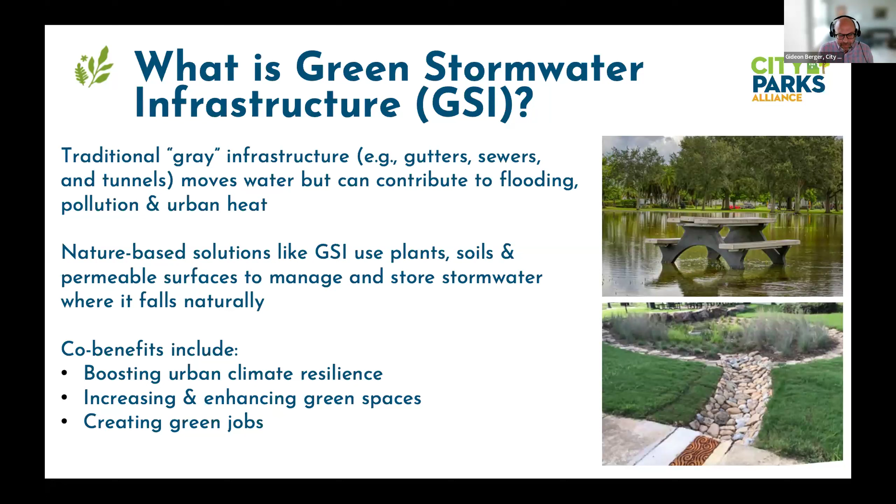Nature-based solutions like GSI use plants, soils, and permeable surfaces to manage and store stormwater where it falls naturally. Some of the benefits of using nature-based solutions like GSI are that it can boost urban climate resilience, increase and enhance our green spaces, and even lead to the creation of green jobs.

So why are we talking about GSI in parks? Well, we all know as practitioners that there's an urgent need to adapt our infrastructure as storm events have been becoming more intense and unpredictable. We also know as parks professionals that parks are the largest publicly controlled green spaces in our cities, so they serve lots of important functions as infrastructure. They mitigate heat, they manage flooding, they deal with stormwater, so they represent an incredible opportunity for putting GSI into our city's infrastructure.

When deployed, they can also enhance biodiversity and ecological health, as well as public health, by reducing air and water pollution and the effect of urban heat, creating new green space, and positively impacting public health, addressing things like respiratory and heat-related illness.

So what's the connection between parks, GSI, and equity? Well, historically, discriminatory policies have limited housing access for minorities, immigrant groups, and lower income families. These communities tend to have less green space and are more prone to flooding, extreme heat, and pollution. So GSI projects in existing or new parks in these communities can help address some of the environmental justice needs they have, and also create opportunities for workforce development and address public health disparities.

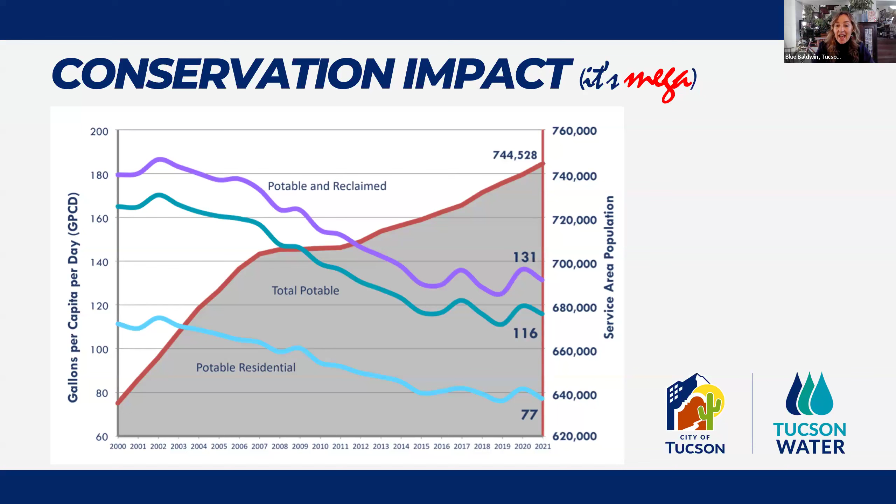Over the years, all of these conservation methods have had a humongous impact. The purple, green, and blue lines represent water sources, and the red line represents the population of Tucson, Arizona. The shocking fact is that today, Tucson Water serves the same volume of water to customers as it did in the 1980s. So we've done an incredible job.

Looking at this from a policy perspective, our mayor and council declared an emergency back in 2020. That set the stage for the different departments to develop plans to address climate action and adaptation. We looked heavily into the electric vehicle roadmap, even mandating that any multifamily housing include infrastructure for that, implementing an urban forestry program and hiring an urban forester with a goal of planting 1 million trees in 10 years, and then kicking into this green stormwater infrastructure program.

This set the stage for us to start developing a plan that was adopted by Mayor and Council in March of 2023 that we call Tucson Resilient Together. All of those programs center equity as one of the frameworks through which to enact these climate resiliency actions. As Greg was saying, the city chose to launch a green stormwater infrastructure program at the bequest of our mayor and council, who are very forward-thinking and proactive around climate mitigation.

They voted unanimously to create a fee that every Tucson water utility customer inside the city of Tucson pays into. That fee is 10 cents per CCF consumed, that's 748 gallons of water, which averages about 91 cents per household. So it's a pretty nominal fee.

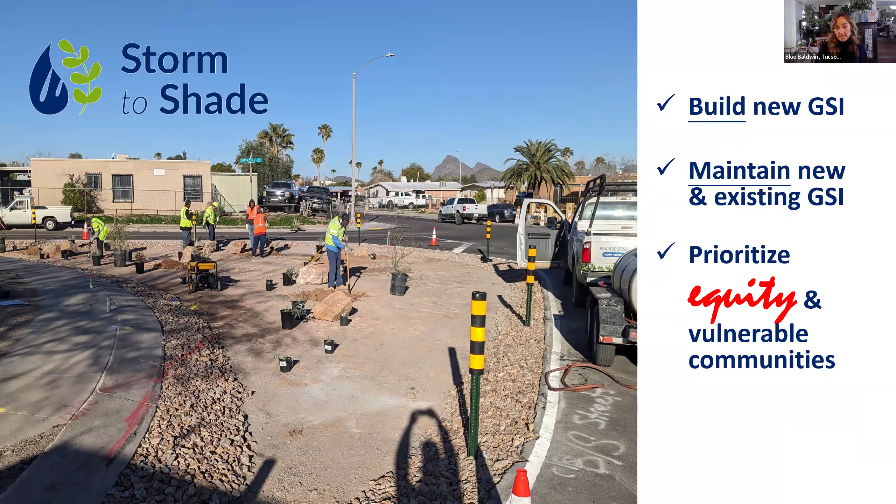Tree equity was created by an organization called American Forests. It smushes together demographic indicators like age, race, employment, ethnicity, with climate vulnerabilities like percent tree canopy and surface temperature.

So we're in it for the co-benefits, as I mentioned. For us, green stormwater infrastructure pulls stormwater flows off of impervious surfaces like roads, parking lots, rooftops, and reduces minor flooding in that way.

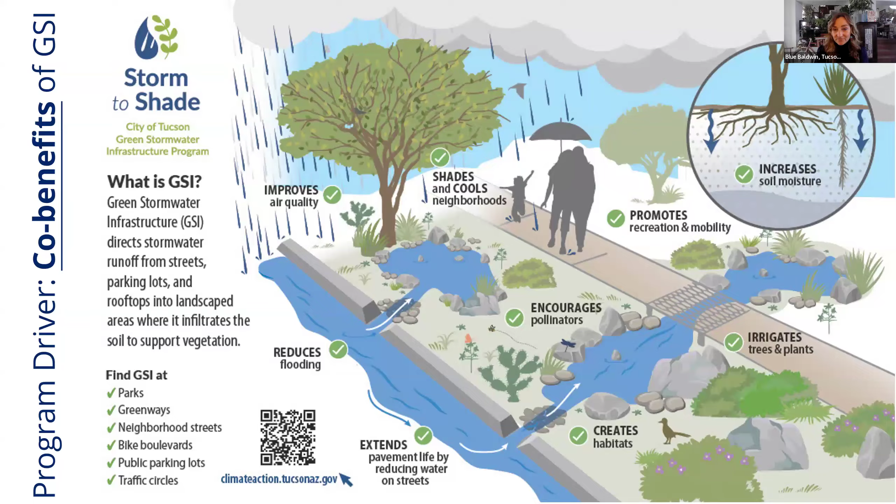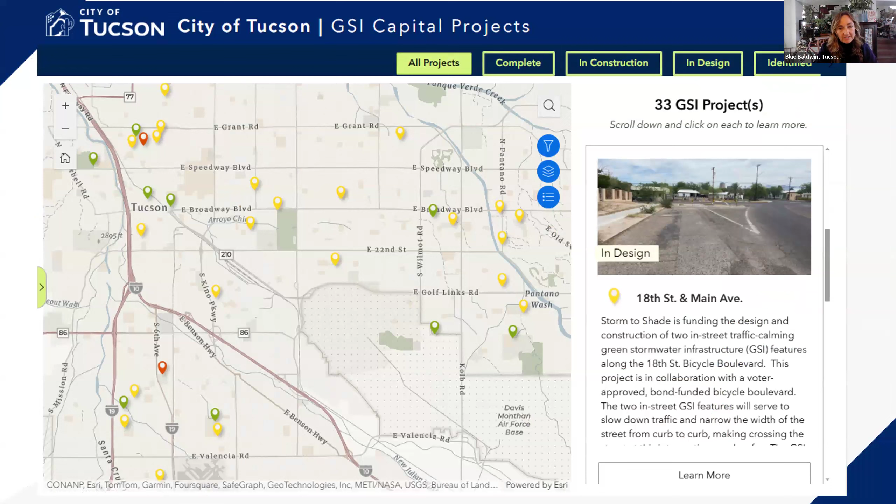The way that we began looking at identifying projects is there were already some existing improvements happening within the city. One of the big ones was the 407 bond, called Tucson Delivers Better Parks and Connections. Connections being things like pedestrian safety projects, greenways, protected bicycle boulevards, those kinds of things.

So we looked at the list of all of those projects, all of which have a certain time frame and budget attached to them, to see if there's opportunity to partner with those existing projects and add green infrastructure, bringing additional value to each of those projects and leveraging funds so that we're not mobilizing construction equipment twice. So really dovetailing with parks, who are doing the parks projects, and the Department of Transportation that's doing the connections projects.

We also work very closely with each of the city's ward offices because those are the folks on the ground close to their communities who really know where investment is needed. And then again, there's that equity piece where we're constantly looking to invest where it's most needed.

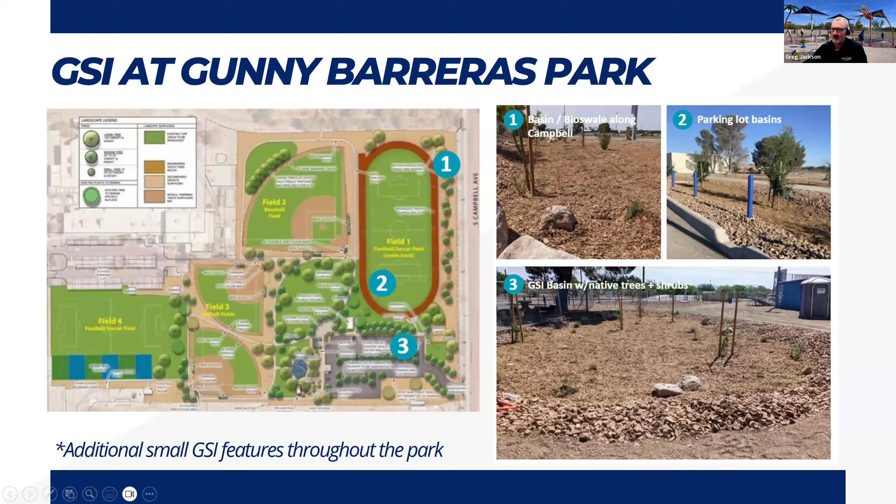But this was a project that Park and Rec was spending about $5 million. And Blue, what did you guys spend? We spent about 400 in the end, I think. Yeah, and because this was our first project, we learned a lot from this one. What we also learned is this is a great way to get more trees, more plant materials in the parks, and they had a funding source that wasn't coming out of those park funds. So the community was really benefiting.

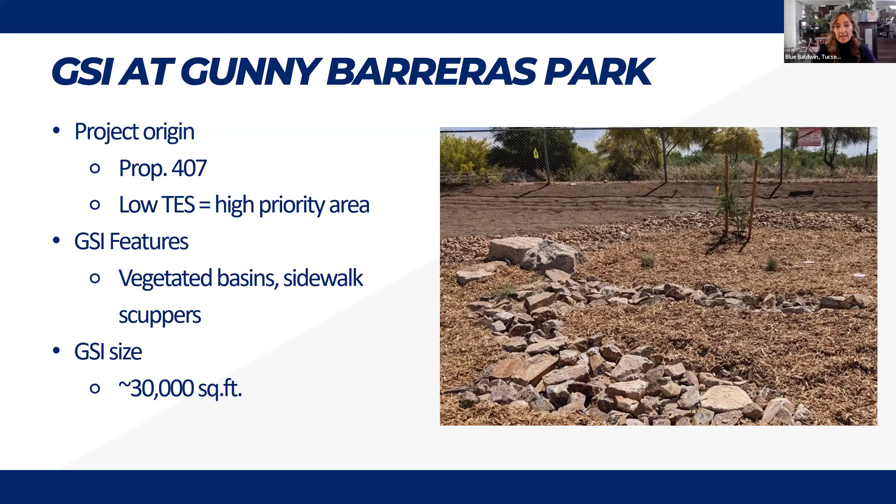Blue, anything you want to add to this slide? Just to say that, as Greg mentioned, the primary source of water for this park project is a large road that just happens to be a lot higher. So that road is the horizontal lines across the top of this graphic.

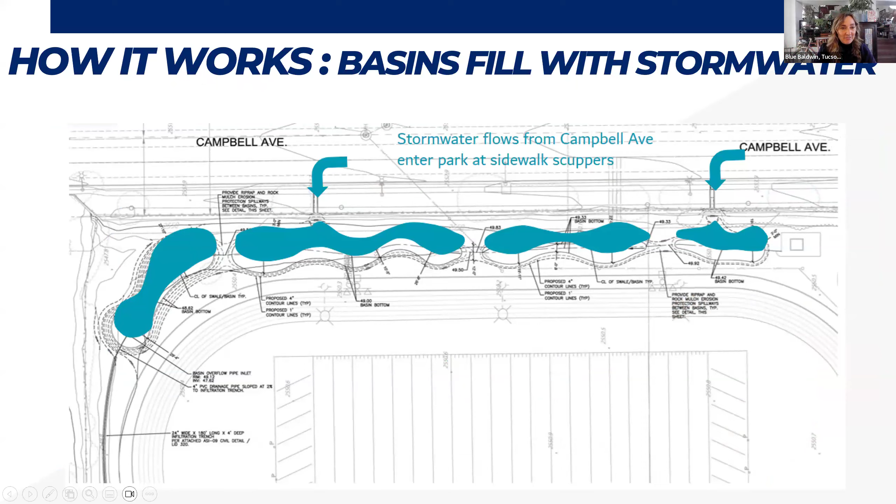Stormwater flows from Campbell Avenue through a couple of sidewalk scuppers that did not previously exist - we installed them. So it flows into these basins, which are technically a bioswale. The flow is designed to start at the right-hand end of the graphic and flow to the left, as Greg's showing with his mouse. And then finally, if those overtop, then they overflow into an existing riparian wash area. And so that's the mechanics of the situation.

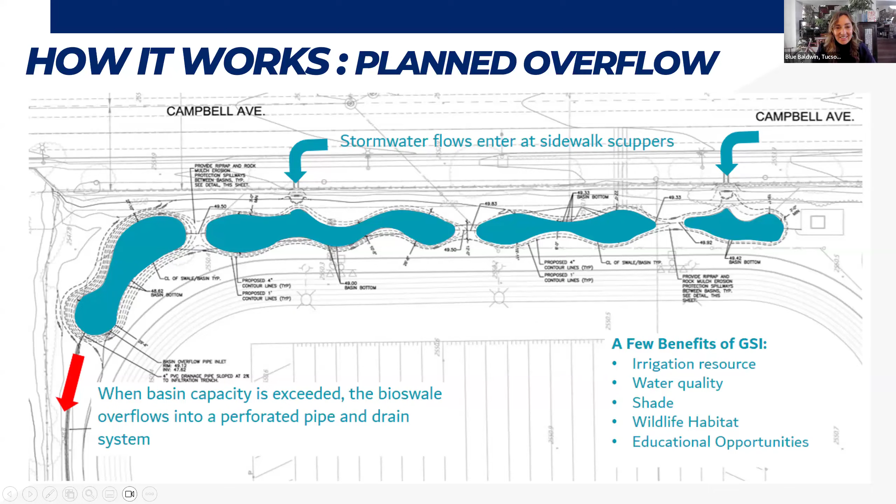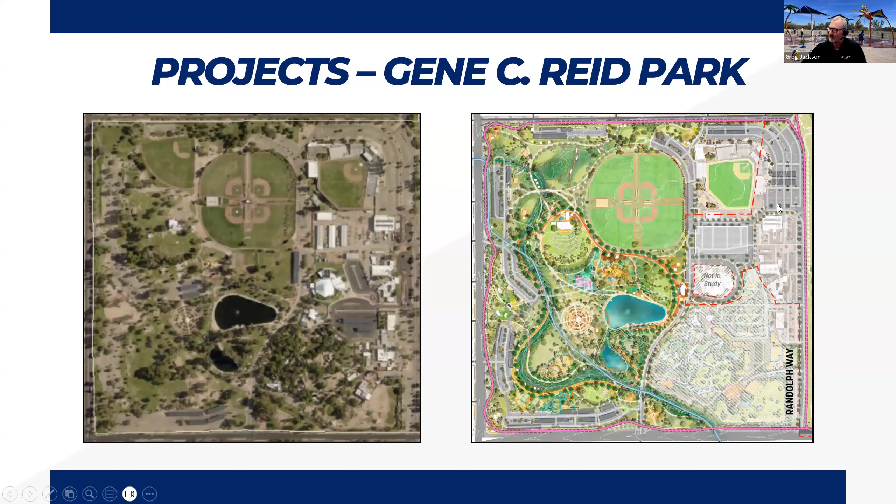I think Chris mentioned earlier being in Tucson back in November and seeing some potential future places. We've got huge parking lots around this baseball field that we're looking at for future green stormwater infrastructure projects in this space.

So all those lessons learned—as Greg mentioned, we figured out pretty quick that getting involved as early as possible saves a lot of heartache and redesigning over and over. The way we worked at Gunny, our very first project, was to integrate completely hand in glove with the existing plans, so the GSI plans just became another set of pages within the entire park plan. We used the same landscape architect and the same construction contractor—super, super helpful.

We also learned that, as probably everybody knows at this point, everything's just a heck of a lot more expensive than it was 5 years ago. When our budget was created in 2020, before COVID, we thought we'd have a lot more funding that would make a bigger impact. But it is what it is, and we're plowing ahead.

Those costs vary greatly by project type. As I mentioned earlier, projects in the street can be as much as 5 times more expensive than projects in parks or on open parcels of land. That doesn't mean we're not doing projects in streets, because streets are used by everyone, so there's a really massive impact when we add vegetation and shade on streets, affecting a whole lot of people. So we're still doing those projects even though they are costly.

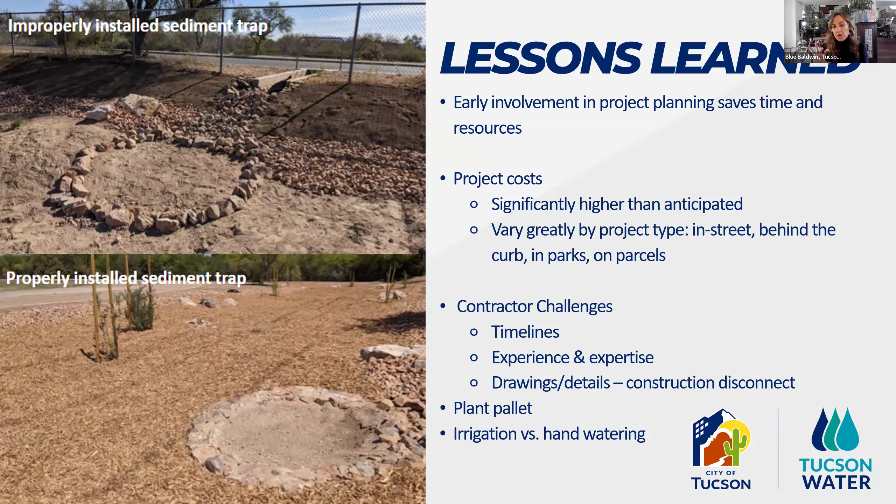And then if we have a drought that comes along, like we did in the summer of 2020, and it's 116 degrees for weeks on end, having an irrigation system in place, even if it's been turned off most of the time, is really helpful. So we're really trying to work with contractors to build irrigation systems that are very simple, pretty low tech, can be easily turned on and off, so that we're not spending a whole bunch of money on them and can still use them when we need them.

Did you want to add anything else, Greg, to that?

Nope. Okay, now we're going to dive into maintenance, because this is a huge piece of the puzzle that often goes unrecognized or at least neglected. Poor maintenance. Everybody loves a shiny, pretty new project, but the long-term O&M is a different story, and often there aren't even budgets for it.

So when Storm to Shade was imagined, its architects recognized the importance of funding for maintenance. So our maintenance budget is $350,000 a year, and we use that to hire independent contractors outside of the city to perform the maintenance work on everything that we build and all of those legacy features that we've identified.

Before we came along, there was all this GSI scattered throughout the city in parks, mostly in streets, some in little neighborhood pocket parks, but there was no proactive program. Maintenance was all reactive, i.e. a constituent picks up the phone and calls somebody at the city and complains that a tree has fallen down or a car has run into a piece of GSI, and then the city has to respond.

Another big challenge initially was that these assets were located in different city departments. So anything in a street belongs to DTM, anything in a park belongs to parks, anything on a Tucson Water well site belongs to Tucson Water. And each of these departments works very much in a silo, and they do not use a common asset management system. So there was a lot of missed communication, or just no communication venues, in order to address these challenges.

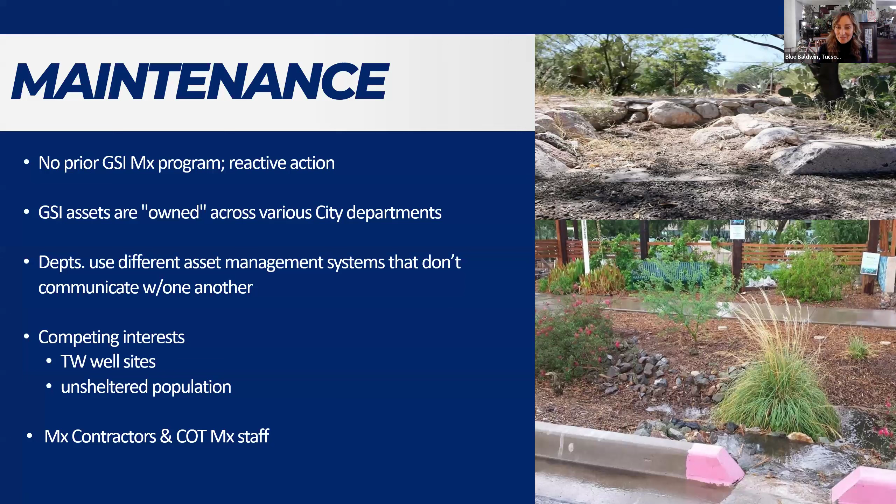We will build a project. And then finally, our internal city maintenance staff, whether that's parks groundskeepers or transportation's streets maintenance workers, didn't have a lot of education around the proper best practices for the maintenance of GSI. So there's been a lot of learning happening around here. I think I go into that on the next slide.

So we had a lot of work to do. The first thing that we did was to develop a GSI maintenance protocol, which we got adopted by all the departments in the entire city of Tucson. This is to bring everybody onto the same page about how we do the work that we're doing and why we do it this way, with the bottom line being the way that we maintain GSI landscapes is for health of the landscape, to be able to provide maximum benefits to the community, only barring health of humans and safety. So human safety first, but after that, it's all about the health of the landscape so that it can be the best that it can be and provide all of those wonderful co-benefits.

And then we went about training folks. So we started with our internal city crews, parks maintenance folks, streets maintenance folks, and we created 4 modules of training based on that maintenance protocol. We still require that every person who touches landscape in the city go through that maintenance program. So we have an ongoing schedule of trainings.

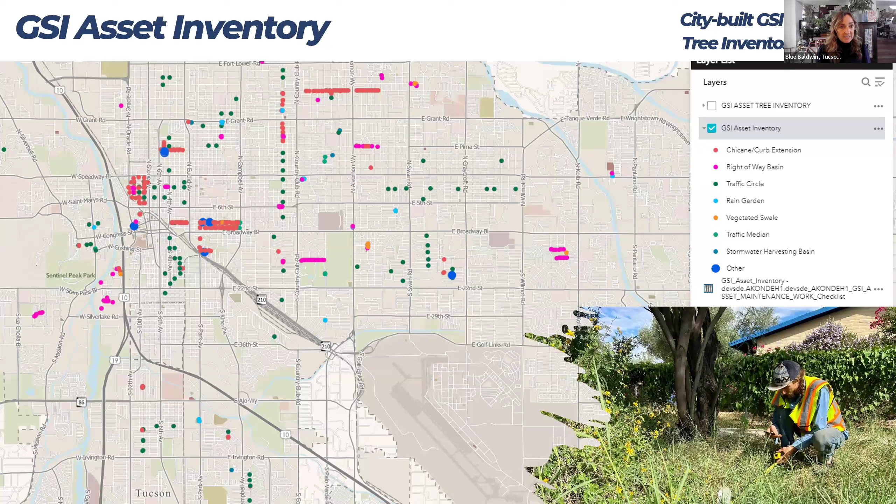We also set about penning MOUs with other city departments that very clearly outline where Greg's department's responsibility begins and ends for GSI, and our responsibility begins and ends for GSI, so that it's very clear - nobody's wondering who's on first. And we have created an asset management system which we integrated with Tucson Water. This is our asset inventory. Just to give you a snapshot, there are about 750 assets throughout Tucson, whole bunch, most are in streets.

And then this is just to wrap it all up and put a bow on it - it's all about partnerships and collaboration and communication. So my program, Storm to Shade, working with parks, transportation, Tucson Water, planning and development services, which does permitting, and housing and community development, which is building new housing.

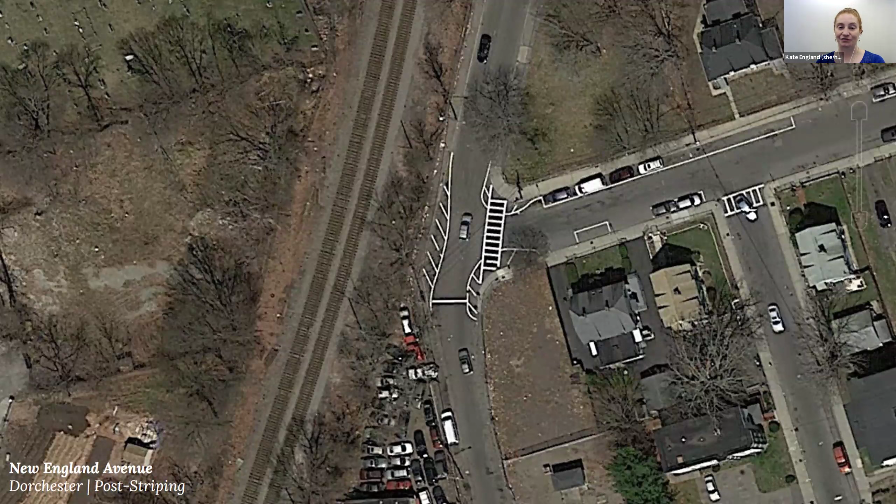You can see that there were a lot of areas that were created that were no longer part of the right of way, at least not accessible to vehicles. So years ago, when I was at Boston Water and Sewer, I approached our Boston Transportation Department and asked if I could take those hatched areas and transform them into green infrastructure.

So the goal was to create a situation in Boston where that last image was the norm, not that first image with all of the paving in that new space created by a teed-off intersection. So we put in place a policy in October of 2022, just a few months after I started my job. We required that projects in the right-of-way that altered the curb line—whether for a safety improvement, a Vision Zero project, roadway reconstruction, whatever it is—are now required to implement one of these 5 types of green infrastructure rather than just paving those newly created bump outs.

In addition to the actual design requirement of adding green infrastructure to these projects, we also included 2 operational components. The first was that we committed to always have 2 maintenance contracts available, one for vegetation maintenance and one for porous paving maintenance. And we committed to starting a citywide green infrastructure volunteer program, which we piloted in 2023 and launched citywide in April earlier this year. I'll talk about the GI volunteer program in a minute.

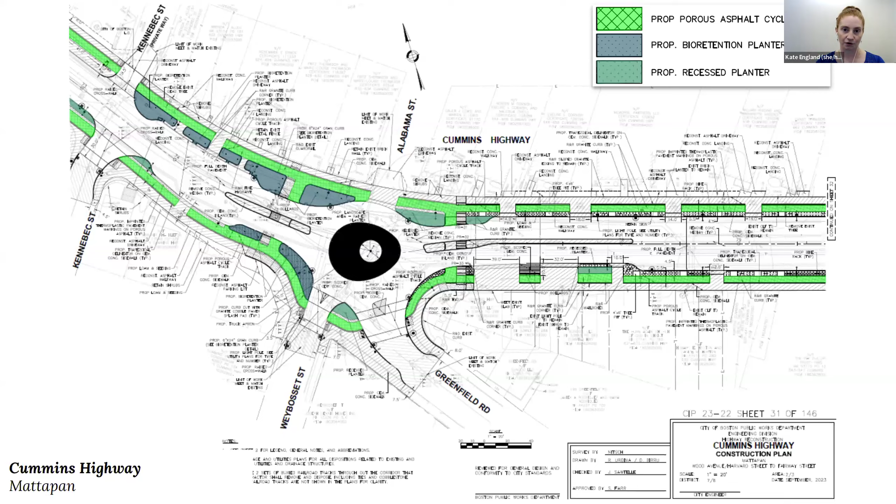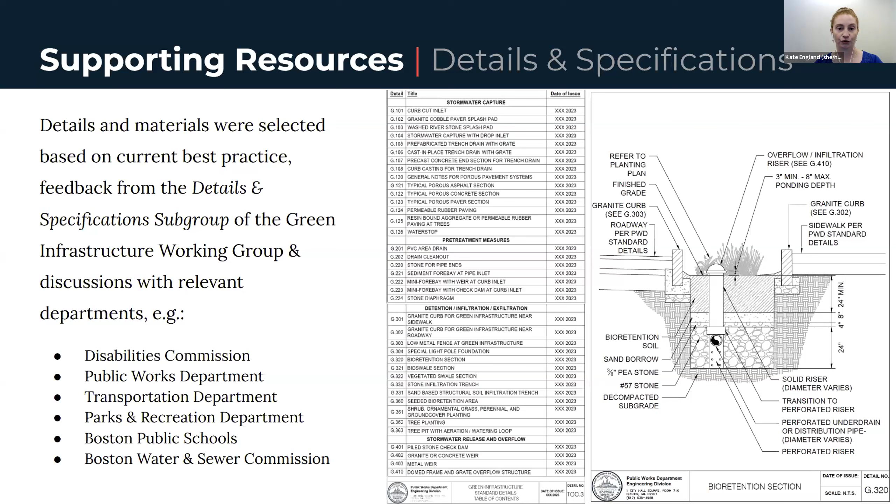We also created a series of supporting resources. Working with the city's Green Infrastructure Working Group, which I will describe in just a minute, we created details and specifications. You can see there's a list of collaborators at the bottom of the slide here. We really intentionally wanted to make sure that we had engaged Public Works, Boston Transportation, our Disabilities Commission, our Parks Department, public schools, Boston Water and Sewer, and actually some additional folks who are not listed here, so that we could get a good understanding of what these details and specifications needed to include so that this kind of green infrastructure would work for everybody.

We also created guidelines, meaning a simple guide to how you should design green infrastructure in these various kinds of roadway areas, as well as a plant palette that has been tested over several years and pared down as we've removed plants that maybe don't perform as well.

We are also currently working on expanding this right-of-way policy. Currently the policy is only triggered if you're changing curb lines, but the new policy captures both public and private projects—not just city projects, but all projects in the right-of-way. It captures projects that are going to go through our Public Improvement Commission, which is our city permitting body for the right-of-way. It's also triggered if you're replacing 250 feet or more of sidewalk.

We are also working on getting in there projects that are proposing pavement restoration for city-owned parking lots and maintenance yards—parcels that are specifically owned by Public Works and Boston Transportation's departments. And the policy's been renamed; it's now the streets policy as opposed to just the right-of-way policy. We are now allowing all green infrastructure that's contained in the Massachusetts Stormwater Handbook.

So all stormwater control measures that are listed and tested have design curves and pollutant removal curves, as well as we are adding stronger requirements for brand new right-of-ways, which doesn't happen very often, but we do have some examples in the city of Boston where a brand new road is being created. For those projects, we are aiming for a 100-year, 24-hour storm event for our design storm, so a significant amount of stormwater storage because they're blank slates and we have no existing utilities underground that we have to navigate.

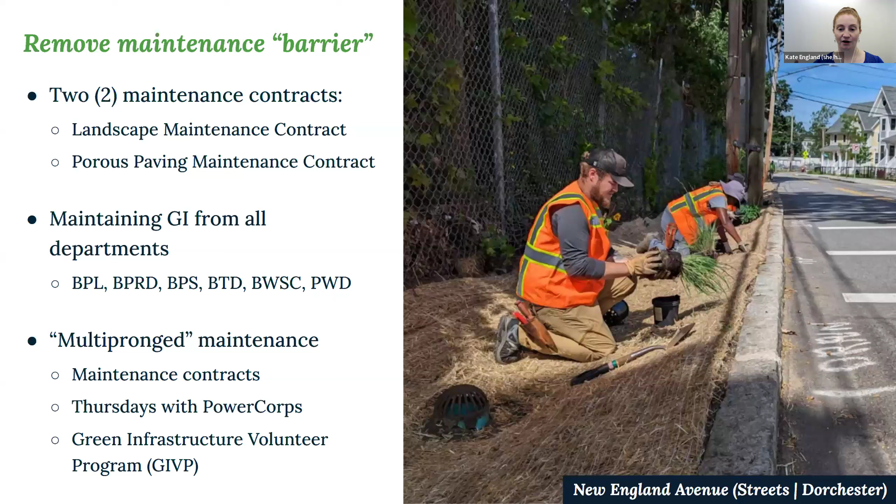We're also taking this kind of multi-pronged maintenance approach. I've seen a lot of really amazing programs in this country do green infrastructure really well but really struggle with maintenance, so I wanted to make sure we had a couple of redundancies in place so that the green infrastructure we were designing and building would stay healthy and functional, look nice, and mature and grow the way we'd like over time. So the multi-pronged approach is maintenance contracts, Thursdays with PowerCorps, which I'll talk about in a second, and our green infrastructure volunteer program.

For our contracts, we are using something I affectionately call creative contracting. Municipal entities, I assume most people on this call are familiar with public procurement, are beholden to a low bid contracting system, which means that when we try to build or maintain anything, whether street sweeping or green infrastructure maintenance, we typically have to do a low bid contract, meaning the contractor who bids the least amount of money is awarded the contract. Unfortunately, that doesn't always result in the best or most knowledgeable contractor, especially with a specialized type of maintenance like green infrastructure maintenance.

So rather than using low bid standard contracting, we are now using an RFP, or request for proposal, process. This allows us to select our contractor based on the proposal rather than the dollar amount bid. It's also allowing us to use the city's certified businesses list, businesses that are women-owned or minority-owned that have gone through a vendor verification process with the city. We can do a 3-quote system where we put out a quote to 3 qualified vendors from the certified businesses list, and award a contract up to $250,000.

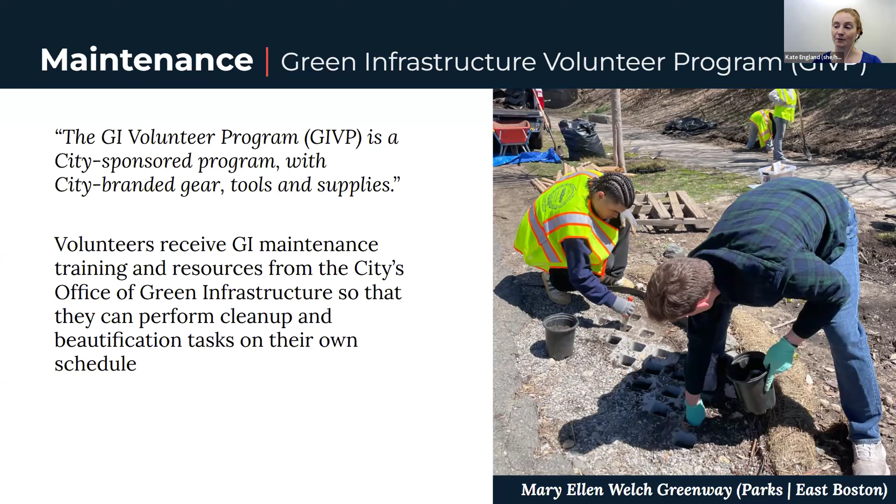We've had really great success. The program's been up and running since April, and we're really excited about how things are going.

The last thing I want to talk about is how we are supporting all of our departments. I mentioned briefly that we have something called the Green Infrastructure Working Group at the City of Boston. This group is a cross-departmental working group where we bring together individuals from departments all over the city to talk about green infrastructure, to help progress our work, and to get feedback about what's going well and what's not.

Currently the large group meets every other month. We have about 60 members in it, and there are over 20 departments that are currently represented.

And then within the working group, we also have smaller subgroups - we have 3 subgroups. Our coordination and maintenance group talks about how to better coordinate our work across departments. As we just heard from Blue and Greg, there are so many benefits to coordinating our projects across departments, including major cost savings.

The second group is our details and specifications group. They were instrumental in creating those details, specifications, and guides that we mentioned earlier with the right-of-way policy.

We also have our policy group, who were huge in creating the revised version of the right-of-way policy that will go into effect by the end of this calendar year. So actually in the next two weeks, which is really wonderful.

We also make capital requests for other departments. My office, as I mentioned, is not technically in any of the existing city departments. So I've been fortunate enough to make requests to add funding for green infrastructure to other departments' projects. For example, the Cummins Highway project I showed earlier is a multi-mile roadway reconstruction.